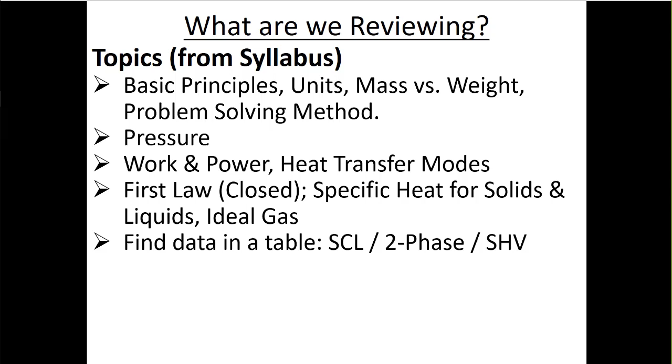We learned about tables, right? For steam tables, we have to be able to use subcooled liquids or find subcooled liquids or two-phase mixtures or superheated vapors, right? So knowing your way around kind of that vapor dome, PV and TV diagrams. And then you might have to find things like specific volume if you want something for a pressure volume relationship, or the change in specific internal energy to deal with the left-hand side of the first law, right?

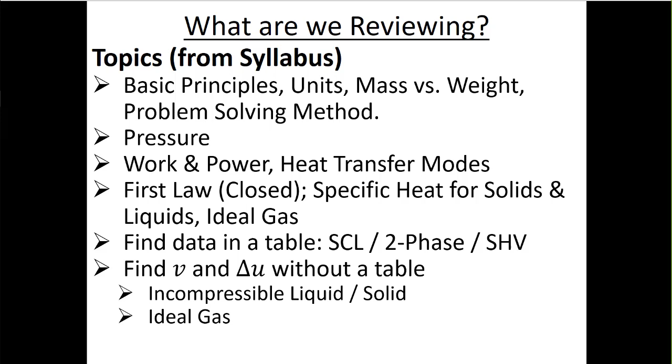We need to know how to deal with steam, right? So liquid water, steam, and two-phase mixtures. But we also talked about ideal gases, right? And how we can deal with ideal gases on a table using table A22 with variable specific heat, or using constant specific heat, making sure that we use CV times delta T to be equal to delta U.

So week one, there's just a whole lot of definitions, right? So you can watch those things again, or just know where to find those definitions. It's not uncommon for a multiple choice question in a thermo exam to be something like, which one of these answers best represents the definition of the word adiabatic, right? And you'd look at what the things are, and then you have to pick the right answer, right? And again, units are always going to be an issue here, right?

So there's definitions that are covered in those week one slides, but those aren't necessarily the only definitions that we'll talk about. For example, you might be asked what a polytropic process is. And I don't think that's something that we talked about in that first week, but we've talked about that since.

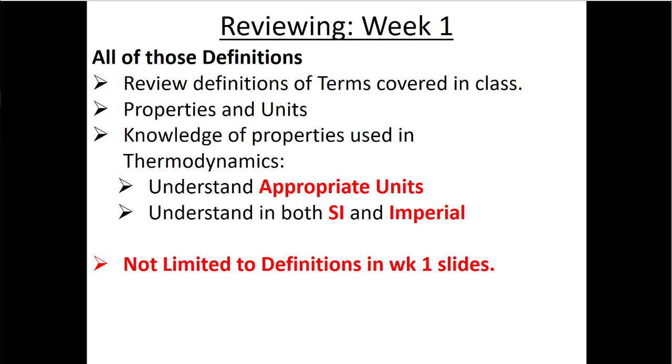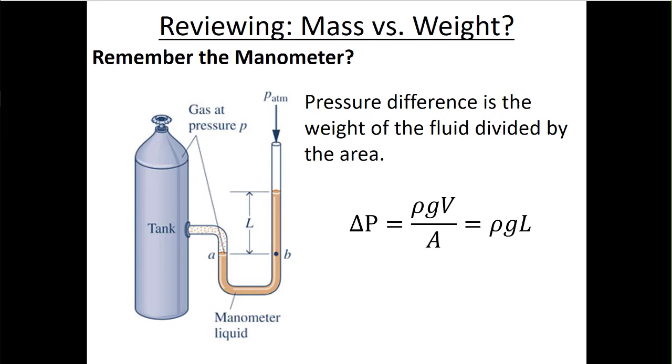Here, we're not going to do questions about pressure. So this is a little bit of an older thing. So you don't need to know about static pressure for the exam, for any of the exams in this course, except to know that pressure is a unit and there's this problem with mass and weight, right? So again, you won't have to do this equation here.

But then we start to talk about what's the first law, right? And there's some words that describe what the first law is, but basically what it tells us is the change in energy in a system over time is equal to all the heat that comes in minus all the work that goes out. Or at least that's the version of the first law that we'll use for closed systems in thermodynamics class. There are obviously different types of energy, but in thermodynamics class, we're really interested in this energy transaction between heat and work. So those are the terms that survive in this equation, right?

I have this kind of schematic of the universe here that I've talked about many times, right? That kind of tries to describe what this equation means, but in picture form, right? And first we talked about how to find the work, right? Work is the integral of PdV, right? Sometimes it's better to find what the work is by drawing out a PV diagram and finding the area, right? So not necessarily with this one because I can't find the area right there, but if this was a linear decrease from 1 to 2, instead of integrating that function, I would take the area of a rectangle and the area of a triangle, right?

But if it's a more complicated function like PV to the 1.5 or PV is equal to constant, then I'll actually have to do some calculus, that the work is the integral of PdV, right? So I need to know some function. I need to know pressure as a function of volume, right? So for a polytropic process, PV to the N is constant, or P is equal to some constant divided by V to the N, where V is volume here. I put that back into my equation and I do some integration.

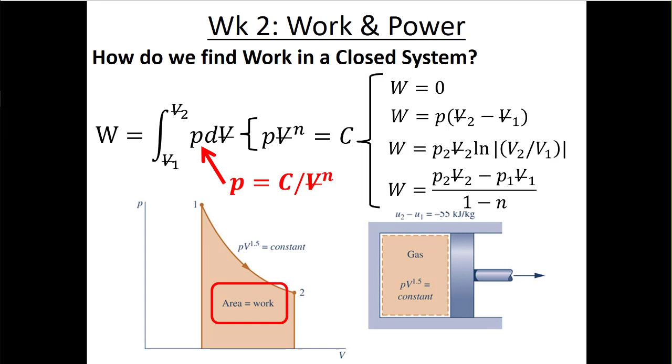Now there are some set answers depending on what our PV relationship is. And if you just want to remember those, you can, but start with this equation, right? Because remember, on the test, your job is to try to demonstrate your understanding, right? My job is to try to look at what you've written and figure out how much of this you actually understand.

So if you just wrote down the work is equal to this equation, but it was actually PV is equal to constant, so you wrote down the wrong equation, there's nothing I can do for you, right? Because you just wrote down an equation and that equation is wrong and you didn't demonstrate that you knew where that equation came from. So all you did was write down a wrong equation, and there's nothing that I can do to help you, right? So try to be,

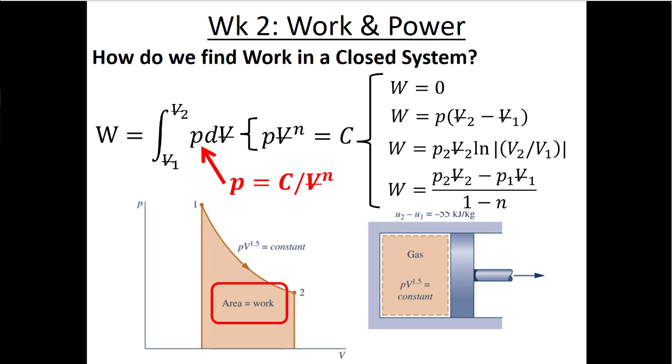explicit with your understanding. And a lot of times, to me, that means you start with the fundamental version of the equation and you work it symbolically as far as you can, and then you put numbers in. And when you put numbers in, you put units in as well. Because I know what the unit conversion mistakes that people usually make are, right? So don't be surprised if you see those kind of things on the exam, because that's part of what we're trying to test for here.

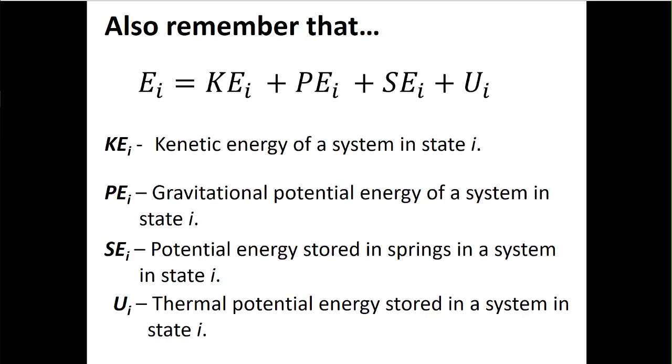So after we find work, we started to talk about what's going on the left-hand side of the equation, right? That E is the total energy at a particular moment in time in our system. So it's the sum of all the different energies: kinetic energy, potential energy. We talked about spring energies and internal energies. But these are all extensive properties. So we could divide all of these things by mass to get the intensive version of these properties.

We'll make some assumptions in this class often to eliminate kinetic, potential, and spring energies, because really most of the problems we're interested in, it's the change in the specific internal energy or the change in the internal energy that drives this difference in the heat transfer in the work. Because oftentimes we're interested in boiling water, and the internal energy difference is very big between liquid water and steam, right? So this is pretty important for us.

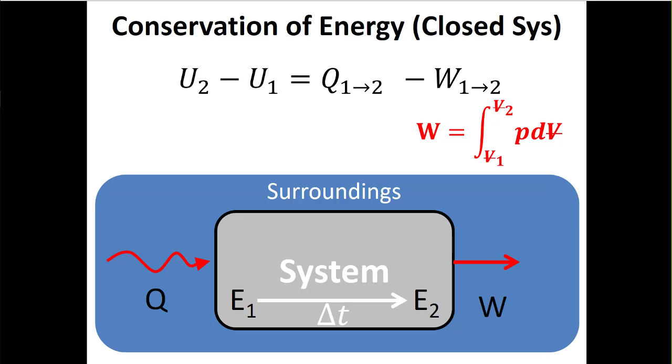So your first law, after you've made some assumptions, might look like this. You'll find that the work is the integral of PdV, and then you'll get that delta big U is equal to mass times the change in the specific internal energy. Remember, the change is always the state at the end minus the state at the beginning. And then you can use that information to find the heat transfer associated with the process. Now, how do you find delta U?

This is kind of like, this class is a bit like a choose your own adventure book, right?

Or maybe like something, I don't know if people probably don't still play something like Temple Run. I used to, when I lived in Toronto, I'd take the commuter train in. So I was on the train like 2 hours a day. So I played a lot of Temple Run, right?

And in Temple Run, you're always making these decisions. You're going left and then you're going right, you're jumping. And that's kind of what this is too. We've got this change in the internal energy, but which direction do I go? I got to ask myself, what's the fluid? Is it water? If it's water, then I got to ask myself, is it a liquid? Is it a two-phase mixture? Or is it a superheated vapor?

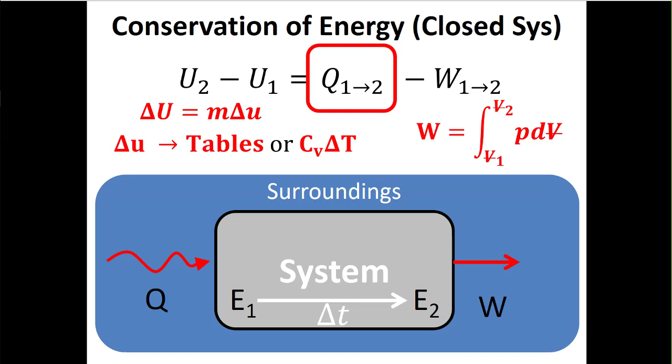And if it's an ideal gas, I got to ask myself, is it constant specific heat or is it variable specific heat? And then I use different strategies depending on the answer to find what the internal energy is or the change in internal energy. So we got introduced to this idea of a TV or a PV diagram. And we know that if it's water, it's got this vapor dome on it. There is no vapor dome, or at least the vapor dome is very, very small on the diagram if it's an ideal gas. But if it's water, we're close to the vapor dome because we're trying to boil things, or condense things.

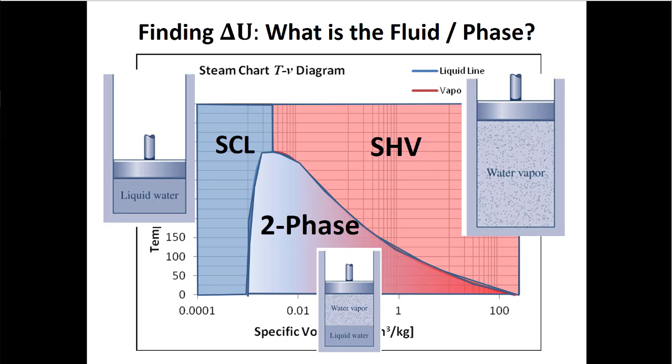So we have this subcooled liquid region, which is above the vapor dome and to the left. Superheated vapor is above the vapor dome and to the right of this critical point. Remember, the critical point is here, the highest temperature and pressure at which you can get a two-phase mixture at equilibrium. And then under the vapor dome, you have some combination of saturated liquid water and saturated vapor. Saturated steam.

Right, but then for ideal gases, we started to say, well, these things are pretty important too. Things for like automobiles and jet turbines, or jet engines. They're going to use gas or something like it, right? So we need to figure out how do we figure out the change in specific internal energy for gases.

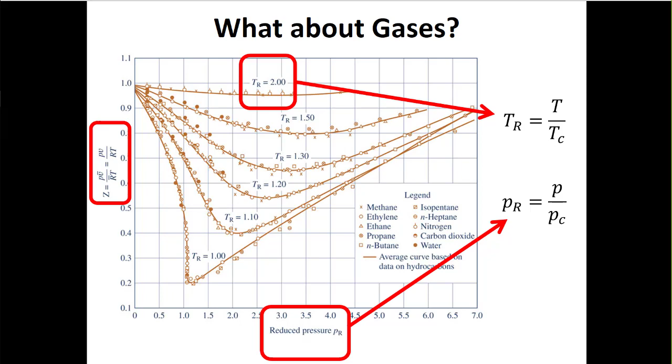And then we talked about this idea of the compressibility factor. That's what Z is. And if the compressibility factor is 1, we get an ideal gas, and we get compressibility factors equal to 1 when the temperature of the gas is much higher than the critical temperature, the temperature at the top of whatever vapor dome exists for that gas, or if the pressure is much lower than the critical pressure. Because as pressure is on the x-axis, as it gets very low, then this goes up to 1. And as the temperature gets very high, then this becomes very flat up at 1.

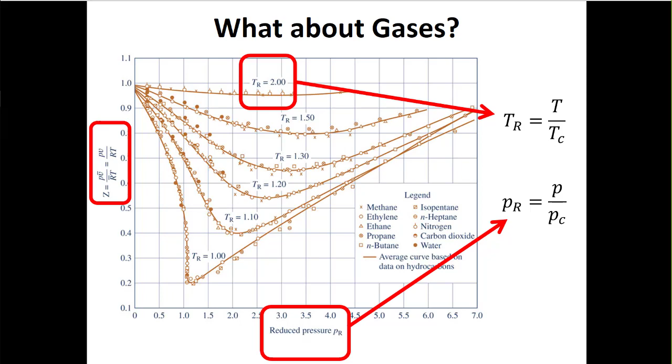And if Z is equal to 1, then we have PV is equal to, we might say in science class, nRT, but in thermodynamics class, we're not talking about moles, we're talking about mass, so kilograms or pounds. So we'll say PV is equal to m, the mass, times R, which is the specific gas constant, times T. We have to remember that the specific gas constant changes for every gas.

And to find the specific gas constant, we take the ideal gas constant, which is the same for every gas, and we divide by the molar mass. I believe that you can find molar masses for specific gases either on table A1 or maybe table A20, but you might want to just flip around those different tables to get an idea for where you can find different things.

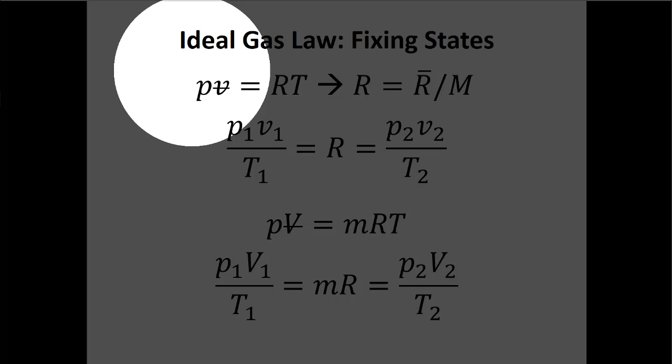Now, the ideal gas law is kind of a nice equation because we can use it in different ways. If I know the pressure, the volume, the mass, and the gas, so I can find the specific gas constant, then I can find the temperature. But maybe I know the pressure and the specific volume, and the gas, and then I can find the temperature.

Or if I'm moving between two states, because we're talking about closed systems where the mass and the gas are the same, so the gas doesn't undergo some kind of chemical reaction so that its R value changes, then we know that pressure times specific volume divided by temperature is equal to the pressure at state 2 times the specific volume divided by the temperature at state 2. So Pv over T is constant, or pressure times volume, big V over T, is also constant for ideal gases. So we can use the ideal gas law in that way, especially when we're moving between states.

I like to use this version of the ideal gas law because I find that I can construct something where I'm less worried about unit conversions than if I'm using sort of the base level version of the ideal gas law.

So then we talked about, for liquids and for ideal gases, we can use specific heats. Now, for liquids, we can pretty much always do this, where cv is equal to the partial of u over the partial of T at constant volume, and cp is equal to the partial of h over the partial of T at constant pressure. But for liquids, cp and cv are the same, so it doesn't really matter. But if it's an ideal gas, I got to be really careful to use cv and not cp if I'm trying to find the change in the specific internal energy, because for gases, these things are different.

So some kind of things that you sometimes see on tests is maybe it'll be an ideal gas problem, and I'll ask you to use constant specific heat. Maybe I'll give you R bar, and you'll have to look up the molar mass to find R. Maybe I'll give you R bar and R, and you get to demonstrate that you understand which of those two things you're supposed to use. I might give you cv and cp, and maybe k, and then you can demonstrate that you understand which specific heat you use to find delta u. So those are kind of things we can do.

Or I could just ask you to treat the problem as a variable specific heat problem, and then you can use table A22 to look up properties and do some linear interpolation. So typically here we would know the temperature, or we'd find the temperature maybe from the ideal gas law, and then we could interpolate on table A22 to find the specific internal energy.

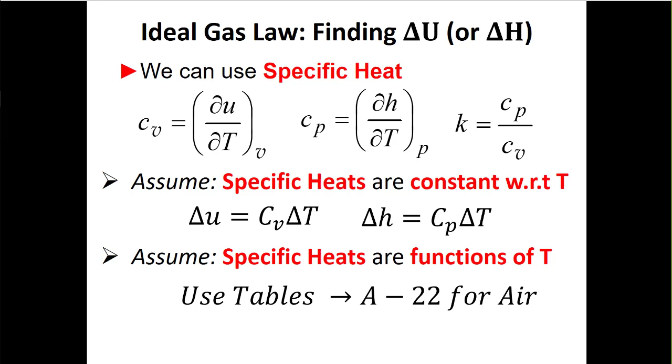So the way I'm going to try to teach this course, the way hopefully I have been trying to teach this course, is that there's a process to these kind of questions. That there's something you can do even if you have no idea what to do. So if you're given some information, I would say make a state table. Draw PV and TV diagrams.

Because these two things, they help you. If you draw a PV diagram, that might help you find the work. A TV diagram might help you find what the phase of the fluid is. Is it going to be a subcooled liquid or a two-phase mixture or a superheated vapor?

If you make a state table, oftentimes in problems, but not always, I'll even print out a state table for you. Maybe I'll put some given information in there, maybe not. But you can start to put that information in, and then any row on that state table where you see two independent intensive properties, then you know you can fix the state.

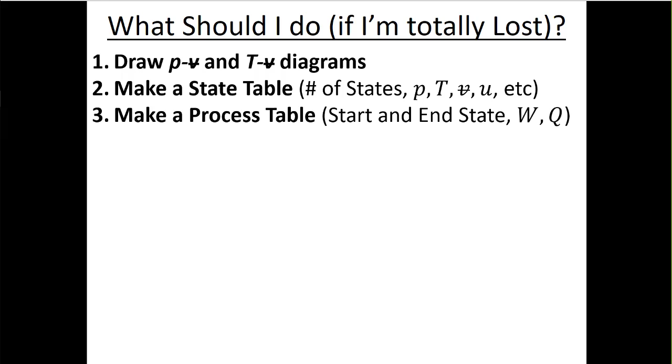I don't usually do this, but you could, especially if you had lots of processes strung together, you could make another table that's a process table that tells you what's the start state, what's the end state, and what's the heat and what's the work. So that's another place where you can just have some accounting going on, telling you what's going on in the process.

Now, if I'm not sure where to start, I can look for what row on my table has 2 or more independent intensive properties. And then I can say, okay, that's a state that I can fix. I can find U. Now I'm good to go for that state. Then you put that information in and you look for maybe process info, particularly if you only have one piece of information about the state.

So if you're trying to find the pressure or the volume, and you know that PV to the 1.5 is constant, and you know that at one state but not the other, maybe you can find P at state 2 because you know V at state 2 and P and V at state 1. Or if it's an ideal gas, you can use the ideal gas law, that PV is equal to mRT.

And that might help you find, say, a temperature at state 2. And then when you know that temperature, you can put that into CV times delta T, or you can take that temperature to table A22 and figure out what the specific internal energy is. Now you can use the first law. This is kind of assuming that you're going to find all the state information first.

You can also just jump right down to here and use the first law from the beginning and get a symbolic solution. If you get a problem and you have no idea what to do, write down the first law. Write down that to find work, you have to take the integral of PdV. Write down that you're going to assume that the kinetic energy and the potential energy are equal to 0, so that delta E becomes delta U, and delta U becomes m times delta little u.

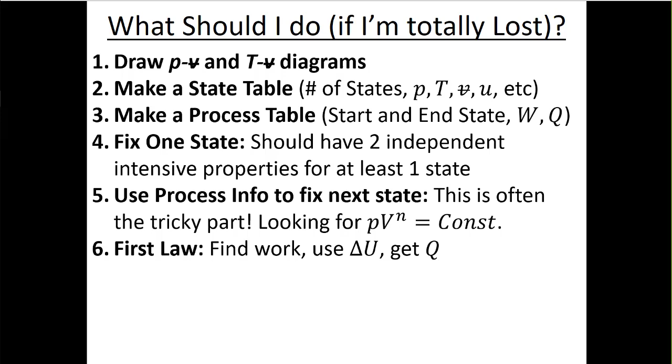And then, just going down the path, maybe then you start to see, oh, now I can fix the state because I got my state table up here. I can fix state 2 because I know all that information. And then maybe you'll say, oh, look, the only thing I need left is one piece of information about state 1, but I know that pressure times volume to the 1.5 is constant. So maybe then you'll be able to do that.

Now, if you have a whole lot of states in your system, you want to complete this step multiple times for different states. So even if you get bogged down with not being able to fix the states, because sometimes that's the hard part, and that's kind of the time-consuming part too, then I would suggest do it all symbolically.

Write down delta E is equal to Q minus W. I'm going to assume some things, and that becomes delta U is equal to Q minus W. Oh, I know that work is the integral of PdV. Even if I don't know what the pressure-volume relationship is in the problem, I can write that down. And then even if I totally get lost and have no idea what to do, instead of leaving it blank, just make something up.

Say, my pressure-volume relationship, I'm going to say that it's linear, right? Because even though you're not demonstrating your understanding of that particular problem, you've demonstrated generally that you know how to do a problem. And that's way better than leaving it blank, because if you leave it blank, there's nothing I can do to understand how much you know what's going on in the class. Even if you have no idea how to do the problem, doing something will help.

So how do we use process info? We ask these questions. Is the process open or closed? This question will be very easy to answer on the first exam because the process is always closed. We've talked a little about open systems, but none of that is on the exam. You have to ask this question first because it defines which version of the first law you're going to use. Because the process is closed, you can write down delta E is equal to Q minus W. We'll make some assumptions, and that becomes delta U is equal to Q minus W.

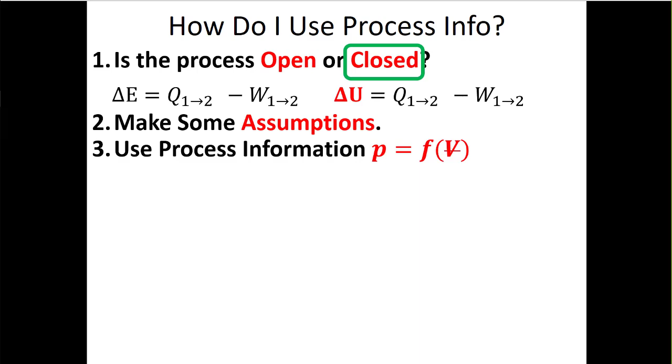Now we look for some information about the pressure-volume relationship. Maybe that's explicitly told to us, or maybe it's an ideal gas and I can figure something out. Then I find that the work is the integral of PdV. Now I found the work, but I need to find the left-hand side of the equation, so I have to fix the states. And for that, I need to know what the fluid is.

If it's a subcooled liquid, then I can use the tables. I would suggest using the two-phase tables. Remember, for subcooled liquids, we can assume that the property of a subcooled liquid at a temperature and pressure is approximately equal to the same property of a saturated liquid, like uf, at the same temperature.

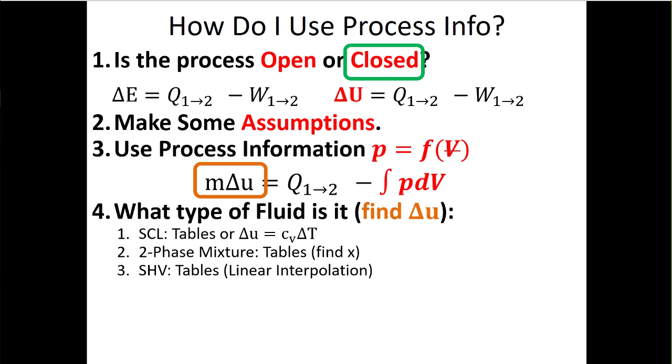If it's a two-phase mixture, what I'd ultimately like to know is the quality. Maybe I have to find that in a roundabout way, because maybe I can find the specific volume, and from the specific volume with the quality relationship, I can find the quality. Once I know the quality, I can find the specific internal energy. I might have to do some linear interpolation on table A4 if it's a superheated vapor.

And if it's an ideal gas, then I have to know, is it constant specific heat, where I use delta U is equal to cv times delta T? Or is it variable specific heat, where I still need to find the temperatures, but then I'd go to table A22 and interpolate. And finally, now that I know the work and the change in internal energy, I can use the first law to find the heat transfer.

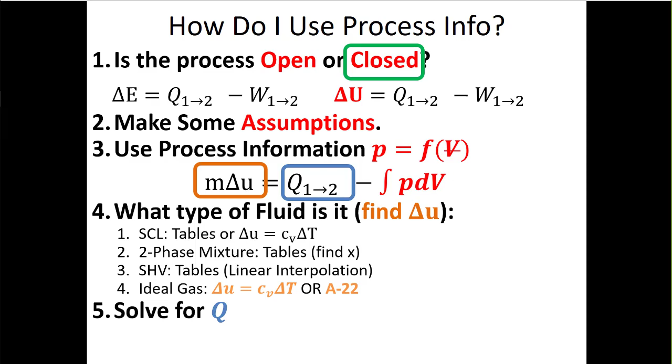So this sheet right here is what you need to know, particularly for the long answer problems. You can certainly expect that the long answer problems will be these first law problems, maybe in one process, maybe in two. This is the kind of thing you'll have to demonstrate you understand on the long answer part of the test. So that concludes the review presentation I have, but I'm happy to answer any questions you might have, or at least try to.

Just a general question about the test. Will there be a place to submit our work for the multiple choice? The multiple choice will be submitted like the quizzes. You won't write out your answer for the multiple choice. You'll interface with it the same way you do with a quiz. You'll go to the quizzes tab, and there'll be something called exam 1. You'll click on that, go through, and pick your answers. Okay.

Any other questions? Could we maybe just go through an example where we're using delta U is equal to CV delta T with an incompressible liquid?

Sure. So let's say you have a pipe, right? Now this pipe is going to take in water. Oh, no, no, I lied, right? I was thinking about open systems. So let's say you have a sealed rigid container, right? And this container is full of water. Maybe you can think about this as your hot water tank, right?

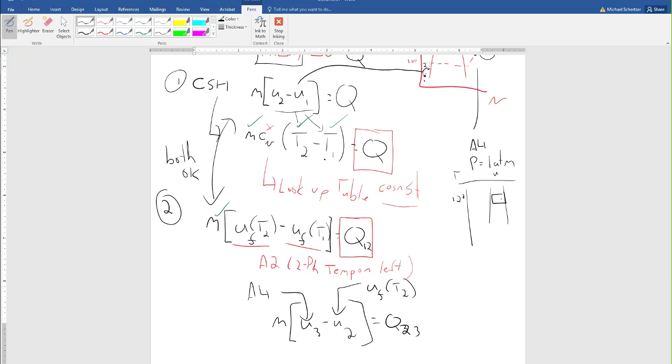So this one's easy, right? If PV to the 0 is constant, that's the same thing because V to the 0 is just 1, right? So that's the same as P is equal to constant. So if N is equal to 0, then this is isobaric. Baric, like bar, the pressure unit, that means it refers to pressure, right? Now there are some other ones, there were some cases where it was adiabatic, some cases where the work was much bigger than the heat transfer. You don't really need to know those.

That's okay. But isobaric means constant pressure. Isometric means constant volume. What else do we know? Isothermal means constant temperature. Adiabatic means no heat transfer. I think that's all we need to know so far. Does that answer your question? Yeah, thank you.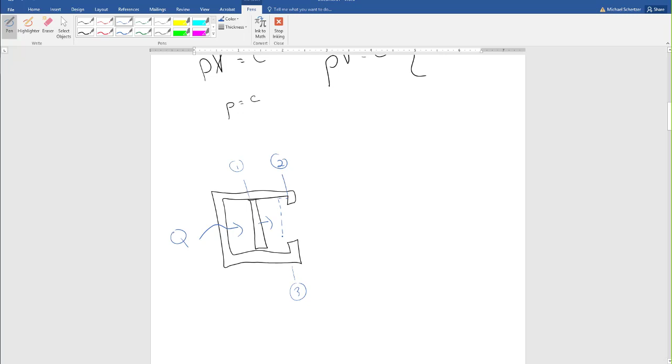So this is my terrible drawing of a piston inside a cylinder, right? But let's say it moves this way, right? So this is state 1. And over here, this is going to be state 2, but it's also going to be state 3. So maybe there's a heat transfer coming in. We'll pretend that's a red line. Now this goes from state 1 over here to state 2, right?

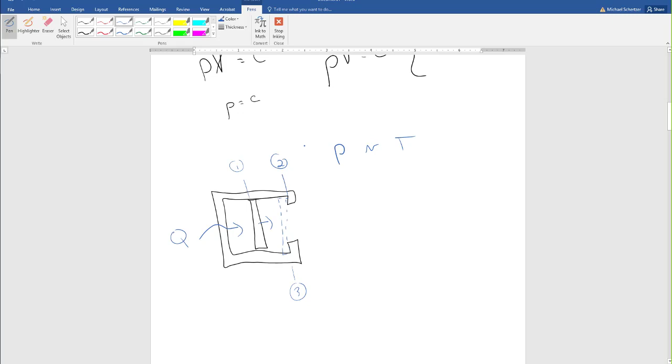So now if I was making a state table, maybe I'd want to have pressure, volume, temperature. Maybe instead of volume, let's do specific volume. State. And we want to know the specific internal energy, right? So now from state 1 to state 2, I can see here that the volume increases, right? So V1, V2. So here I would expect to have some kind of pressure volume relationship. Let's say it's linear.

Right, so here if I drew this, this would be pressure versus volume. Now we're going to start at a small volume and go to a big volume, right? So if it's linear, who knows? Let's say it's increasing. So we go from a small volume up to some big volume, state 1 and state 2.

But then between state 2 and state 3, because this here is on the stops, it's trying to expand, but it can't, right? So because it's trying to expand, but it can't, V3 is equal to V2. But because it's closed, M3 is also equal to M2, right? So that means that specific volume v3 also has to be equal to v2, because this is V2 over M, and this is V3 over M.

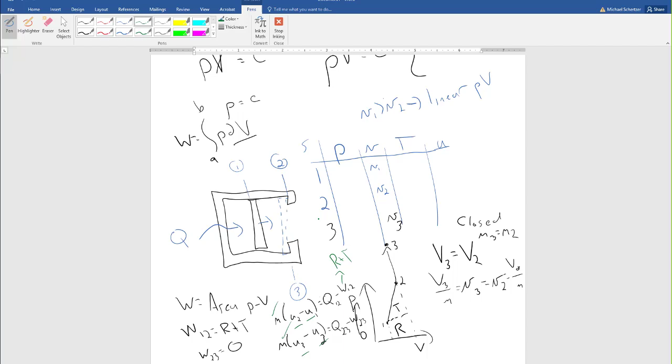So what about if you have a subcooled liquid and the temperature doesn't fit in the range of where the tables start or finish? I remember there was a question like that in the homework. You have a subcooled liquid where the temperatures... I remember that the number started at 500. Oh, right. So that was the first time. I think I know the problem. Oh, my color scheme here is terrible.

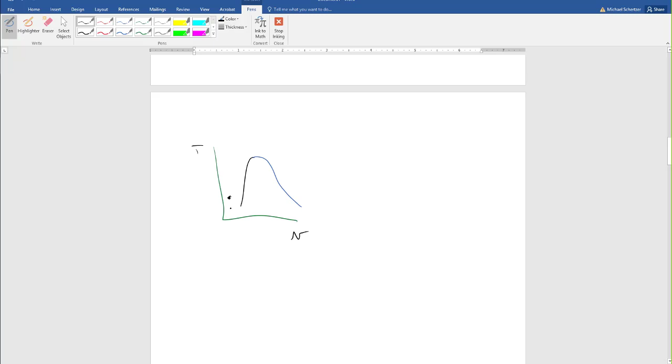So if this was temperature versus specific volume. There was one case where we knew it was a subcooled liquid, and then we tried to go to table A5. But the pressures on table A5, the table you go to for subcooled liquids, are huge. And the reason the pressures on A5 are very large is because it's not worth their time and effort to make those tables and put them in the book and make you pay for the paper, because you don't really need to.

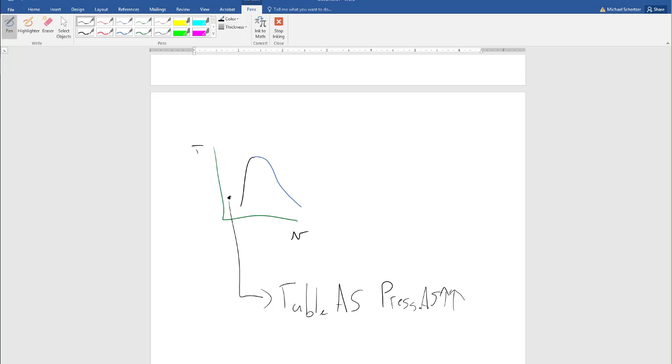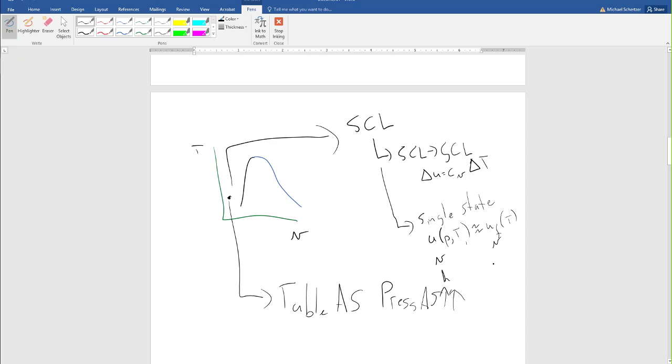So if it's a subcooled liquid, you have 2 choices. If it's subcooled liquid to subcooled liquid, then delta U is equal to CV times delta T. It only really works for delta U. If you just want to know a single state, which you could still do for subcooled liquid to subcooled liquid, then U of some pressure and temperature is approximately equal to UF of that same temperature. And that's true for V, H, although we probably won't see much H, and S on the test. So you can approximate these all as the saturated liquid line.

So basically what we're saying is that state 1 here, if we called this 1 prime, state 1 is approximately the same as 1 prime if we're looking for U, V, H, or S. So for subcooled liquids, I would just go to the 2-phase table and look for the temperature, it's probably best if you know the temperature, but if you know the pressure you can do that too, because this has a huge range of data on it.

It's going to go all the way from basically when the liquid turns to a solid all the way up to the critical point. Although I guess the liquid turns to a solid at different points at different pressures. But you're going to have a really wide range of temperatures there. And I don't think I'll ask you something on the test that would fall out of that range. If it did, or if for some reason you didn't have access to the table, if it was a subcooled liquid to a subcooled liquid, you could do this.